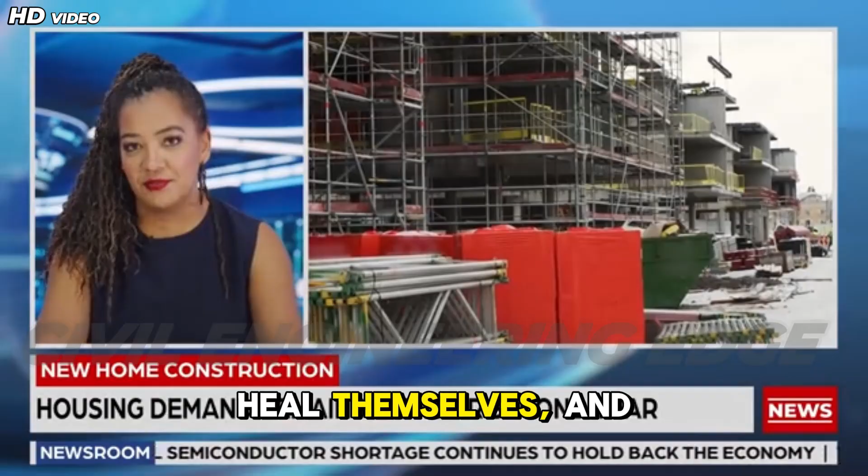Imagine buildings that literally breathe, heal themselves, and even grow over time. What if your home could automatically repair its own cracks, purify polluted air, or regulate temperature like a living organism? Sounds like science fiction, yet this future is already under construction. Today, engineers and architects are blurring the line between biology and infrastructure.

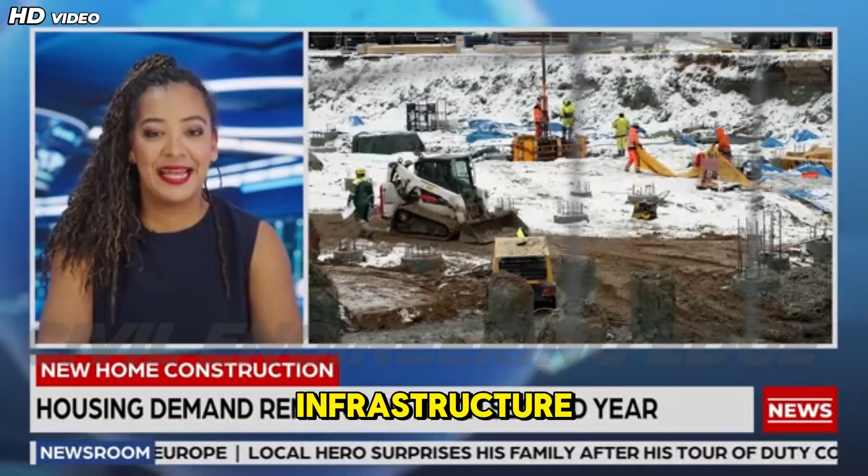Welcome to the revolutionary world of bio-integrated architecture, where buildings are no longer passive concrete shells, but living systems designed to interact with nature. In this video, we'll explore how living organisms, self-healing materials, and bioresponsive systems are redefining sustainability and pushing civil engineering into a new era. Get ready to rethink everything you thought you knew about buildings.

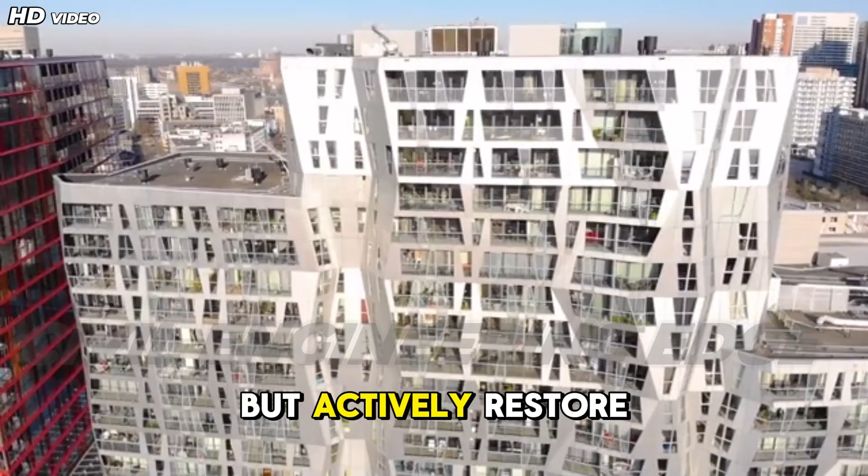Traditional construction has shaped modern civilization, but it has also strained our planet's ecosystems. Today, engineers face a critical challenge: designing structures that do not merely reduce harm, but actively restore environmental balance. In this episode, we dive deep into living buildings and bio-integrated architecture, an emerging field that merges civil engineering, material science, and biology. From self-healing concrete to photosynthetic façades, we'll explore how buildings can become adaptive, regenerative systems. This is not just architecture, it's the future of engineering itself.

Imagine buildings that literally breathe. Imagine a building that behaves not as a sealed concrete box, but as a living, responsive organism, one that continuously exchanges air, energy, and moisture with its surroundings. In bio-integrated architecture, the idea of buildings that breathe is rooted in real engineering systems inspired by biological respiration and transpiration. These structures are designed to regulate indoor environments naturally while improving the external ecosystem.

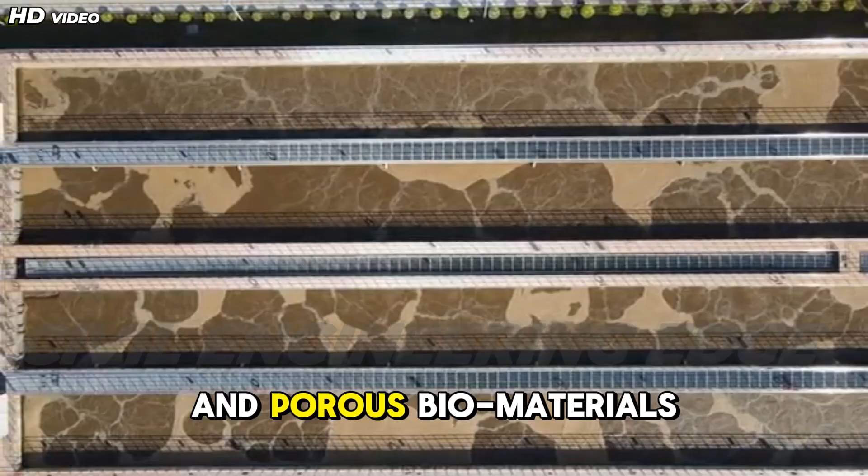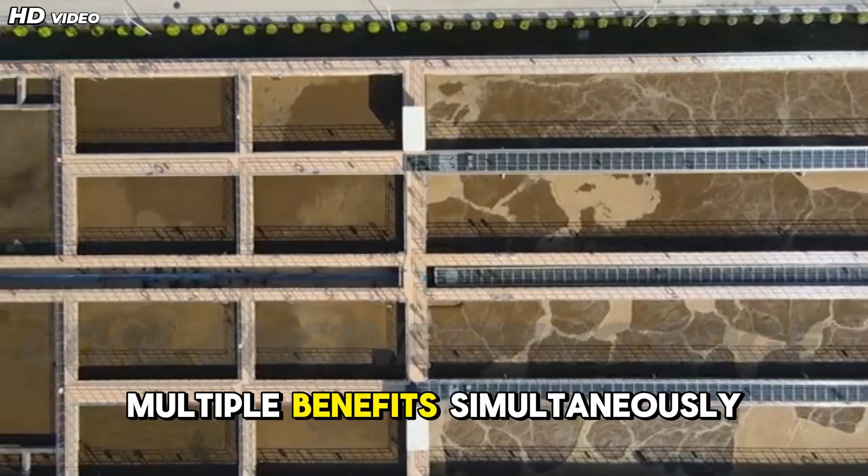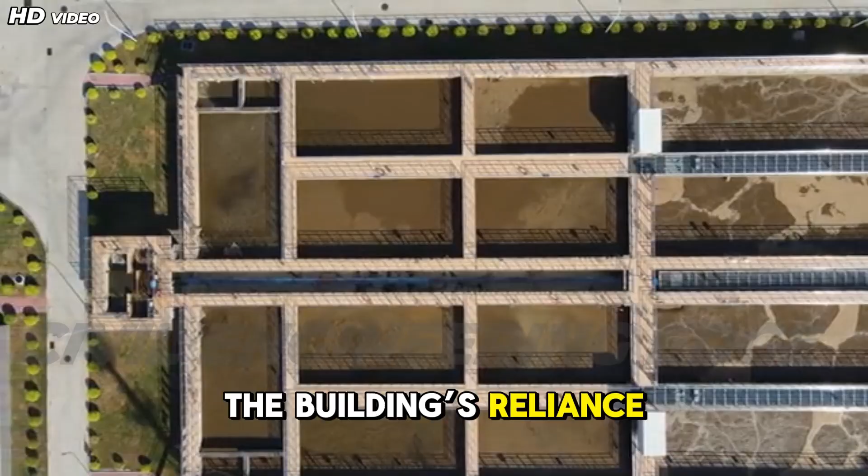Breathing buildings often incorporate living façades, algae bioreactors, and porous biomaterials that enable controlled air exchange. One of the most advanced applications is the use of algae-filled façade panels, where microalgae absorb carbon dioxide and sunlight to perform photosynthesis. From a civil engineering standpoint, this process produces multiple benefits simultaneously: carbon capture, renewable biomass generation, solar shading, and reduction in internal heat gain. As a result, the building's reliance on conventional systems is significantly reduced.

Another key element of breathing buildings is bioresponsive envelopes. These are façade systems designed with hygroscopic or bio-based materials that expand or contract based on humidity and temperature changes. Inspired by plant stomata, these envelopes open when ventilation is needed and close when conditions are harsh without motors, sensors, or external power. This passive adaptability represents a major shift from mechanical dependency to material intelligence.

In polluted urban environments, breathing buildings act as environmental filters. Living walls made from mosses, lichens, and microbial layers trap particulate matter, absorb nitrogen oxides, and improve air quality around dense city corridors. For civil engineers, this transforms buildings into decentralized air purification infrastructure. Ultimately, breathing buildings challenge the traditional definition of a structure. They are no longer static shelters, but active environmental systems that continuously interact with nature. This concept pushes civil engineering toward designs that prioritize adaptability, resilience, and long-term ecological balance.

Beyond green: why do current sustainable buildings fall short? Over the past few decades, sustainable or green buildings have played an important role in reducing energy consumption and minimizing environmental damage. However, despite these advancements, most green buildings remain fundamentally passive systems. They focus on efficiency, using less energy, less water, and fewer resources, rather than actively contributing to environmental restoration. This limitation has become increasingly evident as climate challenges intensify.

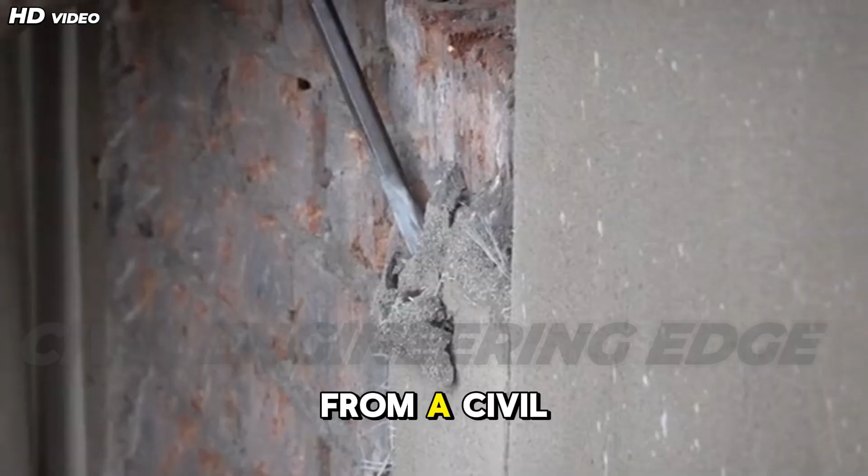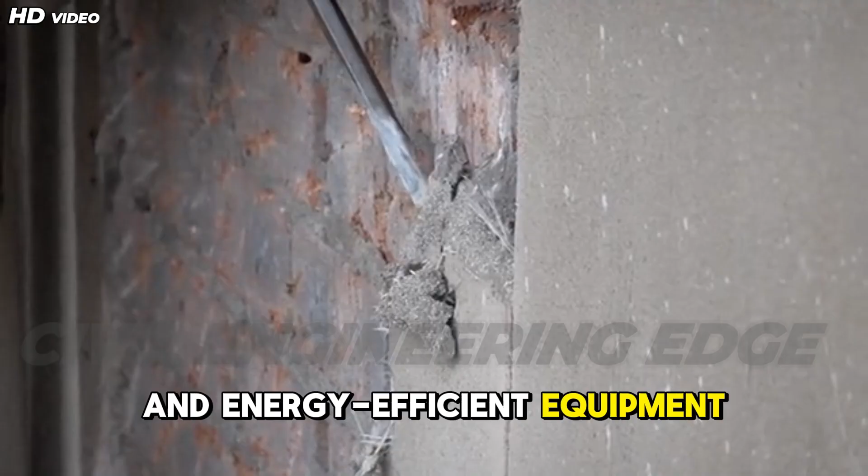From a civil engineering perspective, many sustainable buildings rely heavily on add-on technologies such as solar panels, insulation upgrades, and energy-efficient equipment. While these measures reduce operational emissions, they do not address deeper systemic issues like material degradation, embodied carbon, or long-term infrastructure resilience. Concrete still cracks, steel still corrodes, and façades still deteriorate, requiring frequent repairs and resource-intensive maintenance.

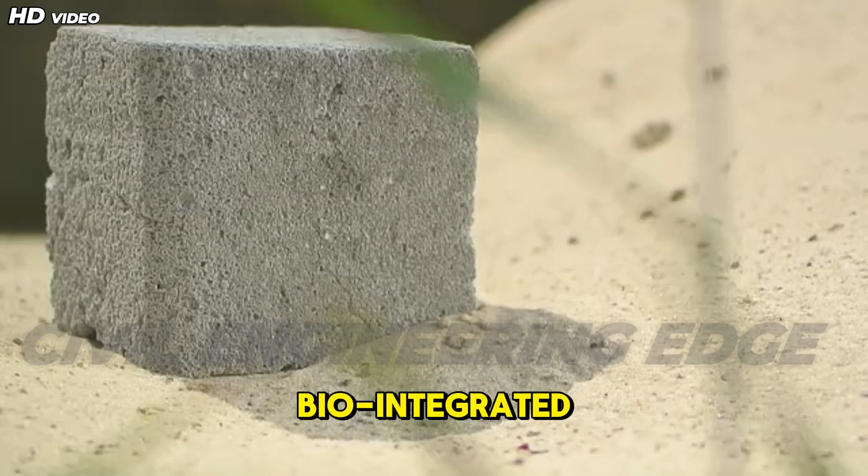Bio-integrated architecture goes beyond efficiency by embedding living systems directly into construction materials. A prime example is self-healing concrete, which contains dormant bacteria that activate when cracks form. When exposed to moisture and oxygen, these bacteria produce calcium carbonate, naturally sealing cracks before they grow into structural defects. For engineers, this significantly extends service life and reduces life cycle costs.

Another shortcoming of conventional green buildings is their isolation from surrounding ecosystems. They may consume fewer resources, but they rarely enhance biodiversity or improve environmental quality. Bio-integrated buildings, in contrast, are designed to coexist and co-evolve with their environment, supporting plant life, managing stormwater naturally, and improving microclimates. In essence, green buildings aim to do less harm. Living buildings aim to do more good. This shift from sustainability to regeneration marks a critical evolution in civil engineering, redefining how infrastructure contributes to planetary health.

A glimpse into the future: bio-integrated cities and living infrastructure. The future of urban development lies not in smarter machines alone, but in living, adaptive infrastructure that evolves alongside its environment.

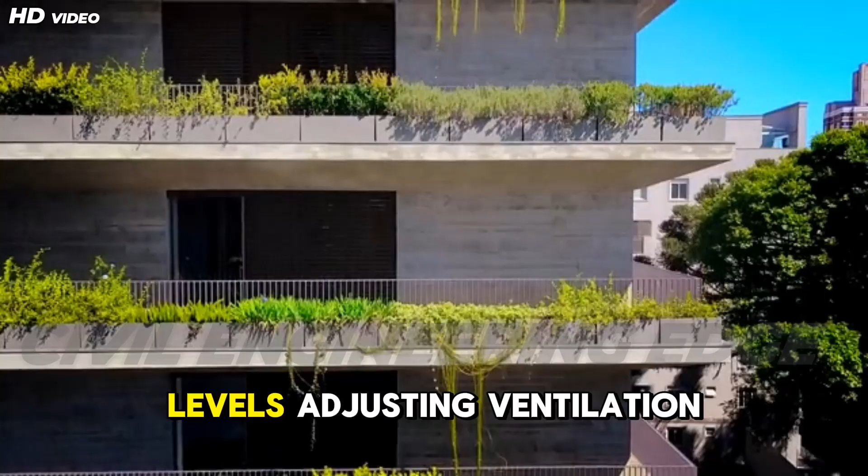Roads and bridges embedded with self-healing materials automatically repair microcracks, preventing premature failure and improving safety. Buildings respond dynamically to temperature, humidity, and pollution levels, adjusting ventilation, shading, and moisture control without human intervention.

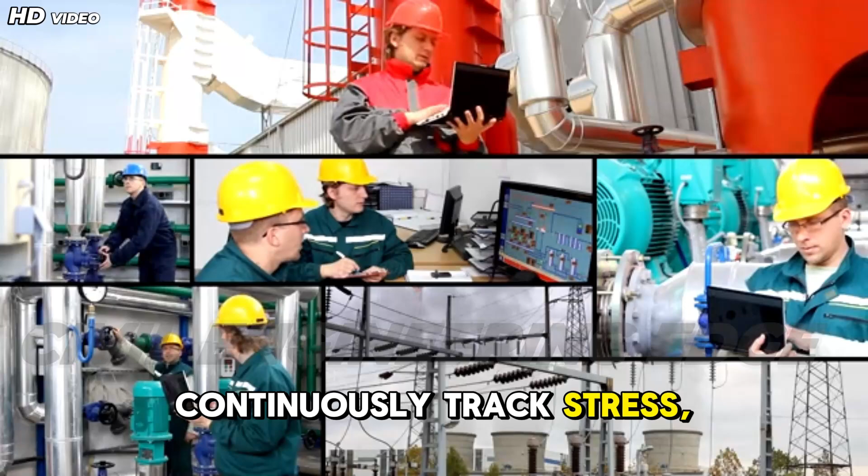For civil engineers, this future demands a multidisciplinary approach. Structural design will integrate biology, material science, and data-driven monitoring systems. Sensors embedded in living materials will continuously track stress, strain, and environmental conditions, enabling predictive maintenance and real-time performance optimization.

Bio-integrated cities also promise enhanced resilience against climate extremes. Living roofs reduce urban heat island effects, bio-based drainage systems manage floodwaters naturally, and adaptive façades improve energy efficiency during extreme weather events. These systems reduce dependency on centralized infrastructure, making cities more robust and flexible.

As research advances and pilot projects scale up, bio-integrated architecture will move from experimental innovation to mainstream practice. Engineers who embrace this paradigm today will shape the cities of tomorrow. Living buildings are not just the future of architecture, they represent the next evolutionary step in civil engineering, where infrastructure becomes a living partner in healing the planet.

Nature's blueprints, from algae to self-healing concrete. Nature has spent billions of years optimizing structures for strength, efficiency, and resilience. Bio-integrated architecture draws directly from these natural systems, translating biological intelligence into engineering solutions. Instead of forcing buildings to resist environmental forces, engineers are now learning how to collaborate with natural processes.

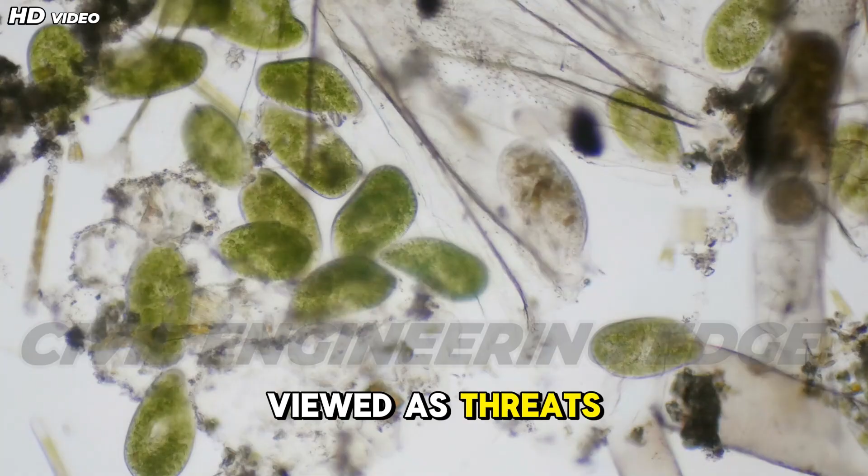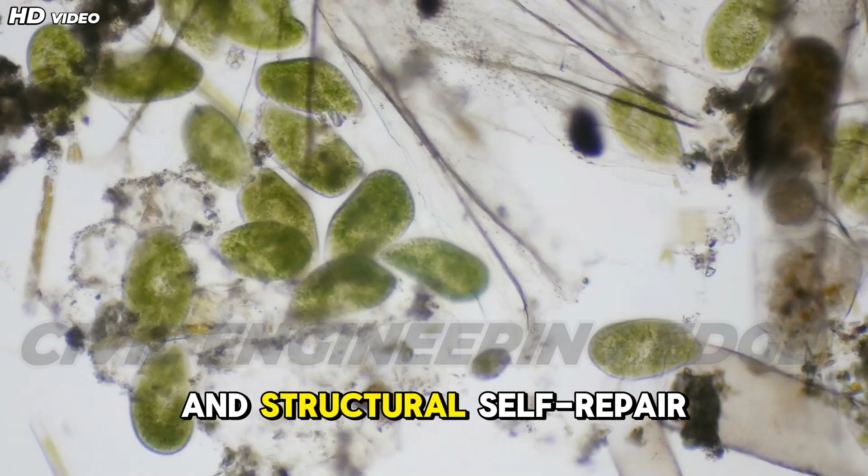Algae, fungi, bacteria, and microbial colonies are no longer viewed as threats to buildings, but as functional components. These organisms perform tasks such as energy generation, insulation, carbon sequestration, and structural self-repair, tasks that traditionally required complex mechanical systems. Nature's blueprints emphasize efficiency through simplicity.

Biological systems operate with minimal energy input, self-regulate under changing conditions, and repair damage autonomously. Translating these principles into construction materials allows engineers to reduce maintenance demands, extend structural lifespan, and dramatically lower environmental impact.

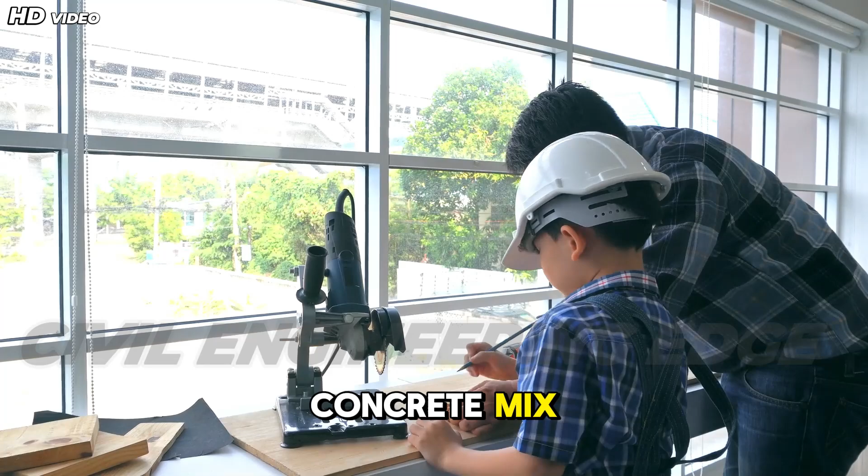For students and professionals alike, understanding these biological mechanisms is becoming as important as mastering concrete mix design or structural analysis. As codes evolve and sustainability targets tighten, bio-integrated materials will move from experimental prototypes to standard engineering practice.

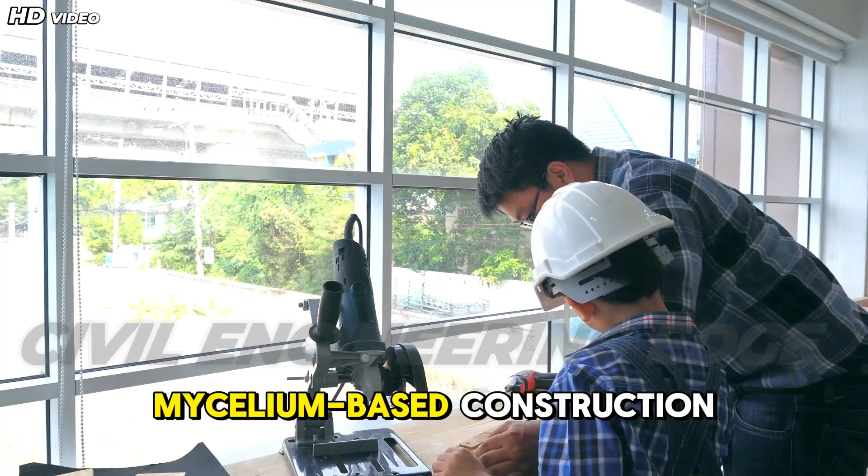This section explores three of the most promising innovations, inspired directly by nature: photosynthesizing façades, mycelium-based construction, and bioreceptive self-healing concrete, each redefining what buildings can do. Photosynthesizing façades, turning building skins into energy factories.

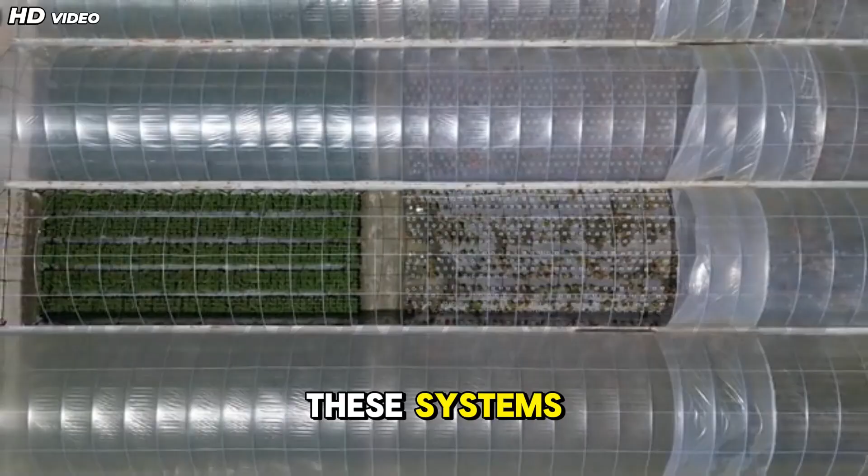Photosynthesizing façades represent one of the most revolutionary applications of bio-integrated architecture. These systems use microalgae bioreactors embedded within building envelopes to convert sunlight and carbon dioxide into usable energy. Unlike traditional solar panels that merely convert sunlight into electricity, algae façades perform multiple functions simultaneously, making them uniquely valuable from an engineering standpoint.

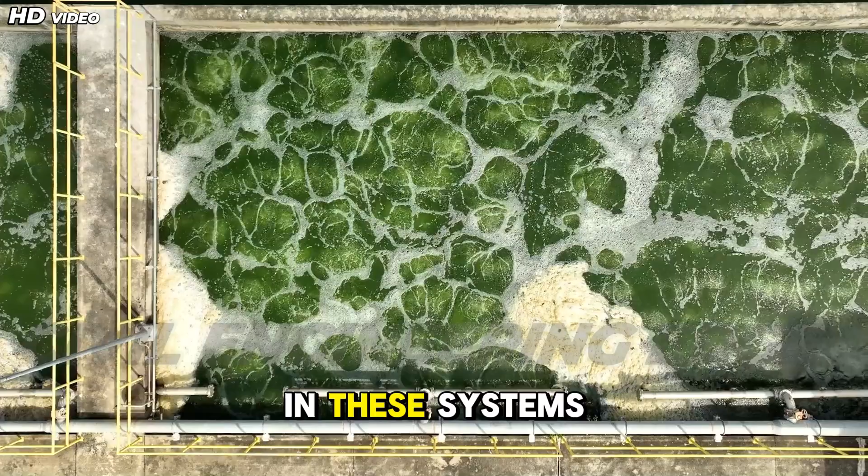In these systems, transparent or semi-transparent panels are filled with water and microalgae cultures. When exposed to sunlight, the algae undergo photosynthesis, absorbing CO2 and producing biomass. This biomass can later be harvested and converted into biofuel or thermal energy.

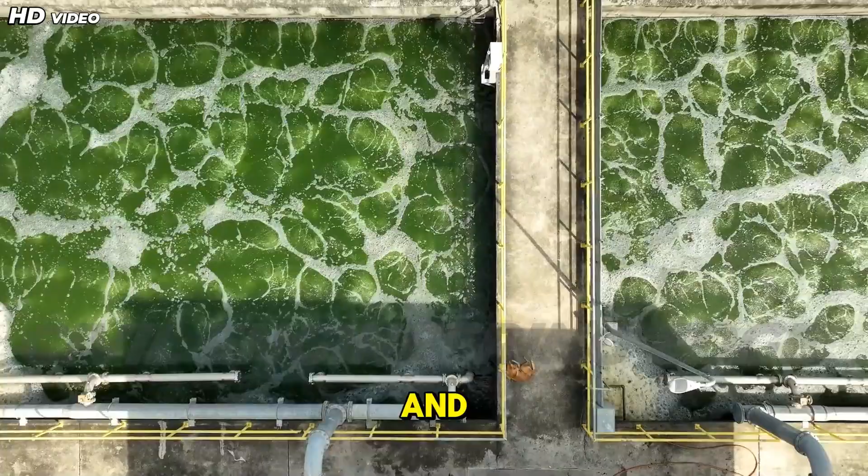At the same time, the dense algae layer provides dynamic solar shading, reducing heat gain and lowering cooling loads inside the building. From a civil engineering perspective, these façades act as climate-responsive envelopes.

As algae density increases in strong sunlight, shading increases automatically. During low light conditions, the panels become more transparent, allowing natural daylight to penetrate. This passive regulation significantly reduces reliance on mechanical and artificial lighting systems.

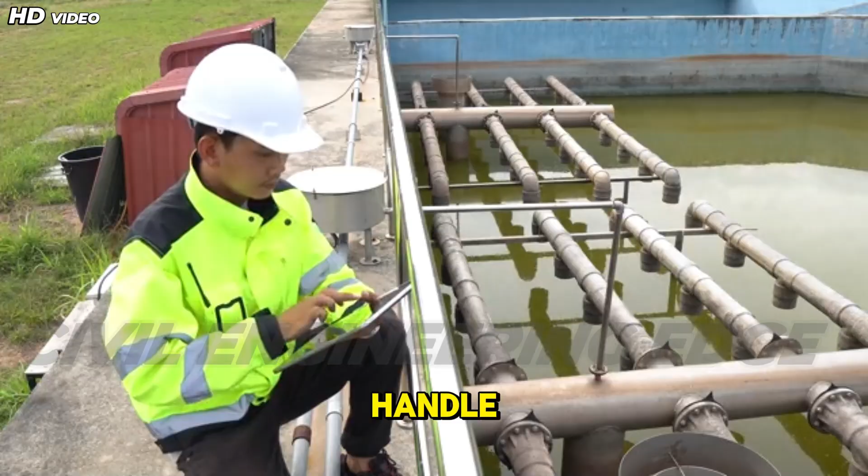Structurally, algae façades must be carefully engineered to handle fluid loads, pressure variations, and long-term durability. Engineers must account for panel weight, anchoring systems, maintenance access, and integration with structural frames. Despite these challenges, real-world pilot projects have demonstrated long-term feasibility and energy efficiency gains.

Beyond energy production, photosynthesizing façades actively contribute to carbon sequestration, transforming buildings into environmental assets. For dense urban areas struggling with pollution and energy demand, these façades offer a scalable solution, turning city skylines into living power plants. Mycelium as a building block, fungal networks in construction.

Mycelium, the root-like network of fungi, has emerged as a surprising yet powerful building material in bio-integrated architecture. In nature, mycelium forms dense, interconnected networks capable of binding soil, decomposing organic matter, and creating structurally resilient systems. Engineers are now harnessing these properties to develop lightweight, sustainable construction materials.

Mycelium-based materials are grown by combining fungal spores with agricultural waste such as straw or sawdust. As the fungi grow, they bind the organic matter together, forming a solid mass. Once growth is complete, the material is heat-treated to halt biological activity, creating a stable, non-living composite suitable for construction.

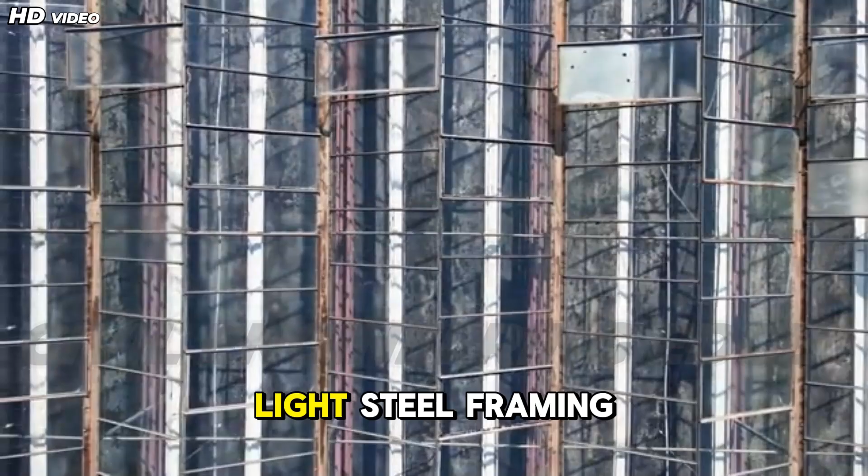Structurally, while mycelium cannot replace reinforced concrete or steel in primary load-bearing systems, it plays a crucial role in hybrid construction models. Combined with timber or light steel framing, mycelium components significantly reduce embodied carbon and improve indoor environmental quality.

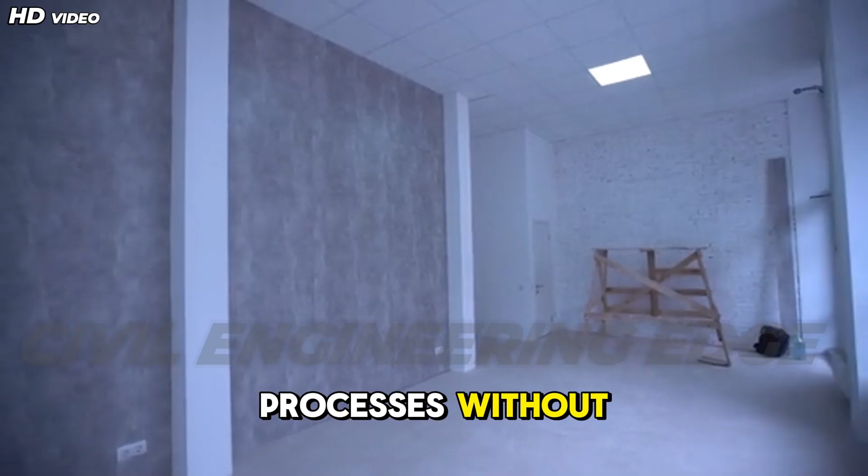Additionally, mycelium materials regulate humidity naturally and resist mold growth, improving occupant comfort. For civil engineers focused on sustainable design, mycelium demonstrates how biological systems can replace energy-intensive industrial processes without compromising performance.

Bioreceptive concrete, materials that heal themselves. Concrete is the backbone of modern infrastructure, but it is also prone to cracking, which leads to durability issues and costly maintenance. Bioreceptive or self-healing concrete addresses this challenge by integrating biological repair mechanisms directly into the material.

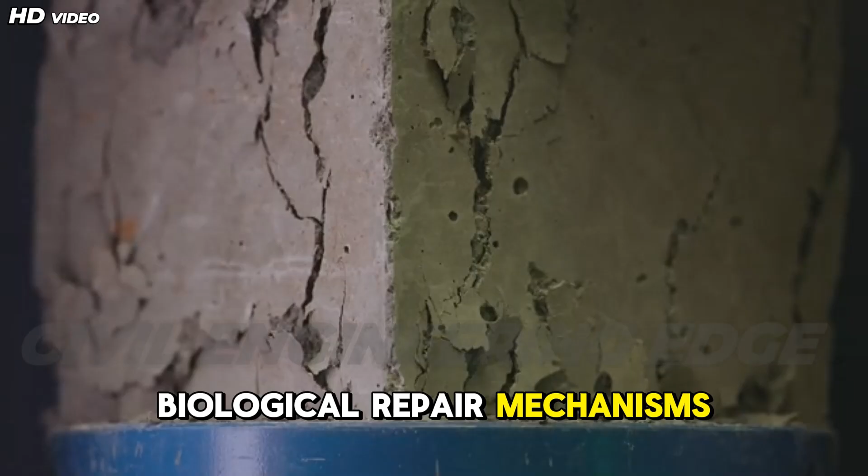This innovative concrete contains dormant bacteria, often from the Bacillus family, along with nutrients such as calcium lactate. Under normal conditions, the bacteria remain inactive. When cracks form and water enters, the bacteria become active and produce calcium carbonate, which fills and seals the cracks naturally. From a civil engineering perspective, this process prevents microcracks from expanding into structural failures.

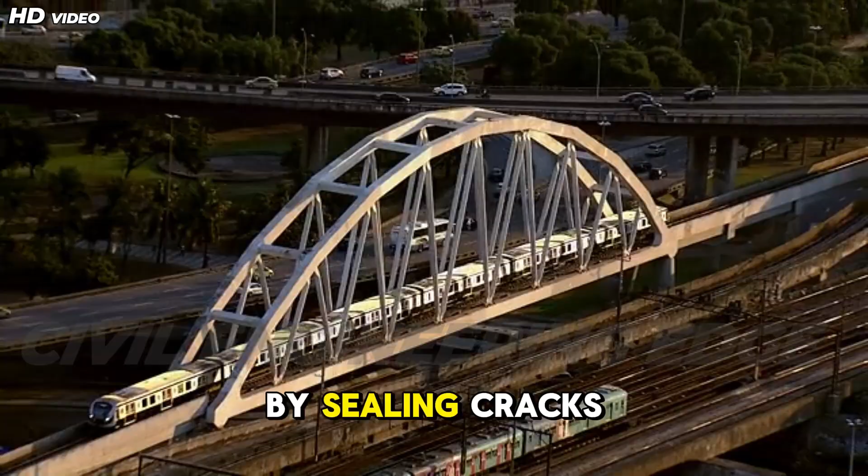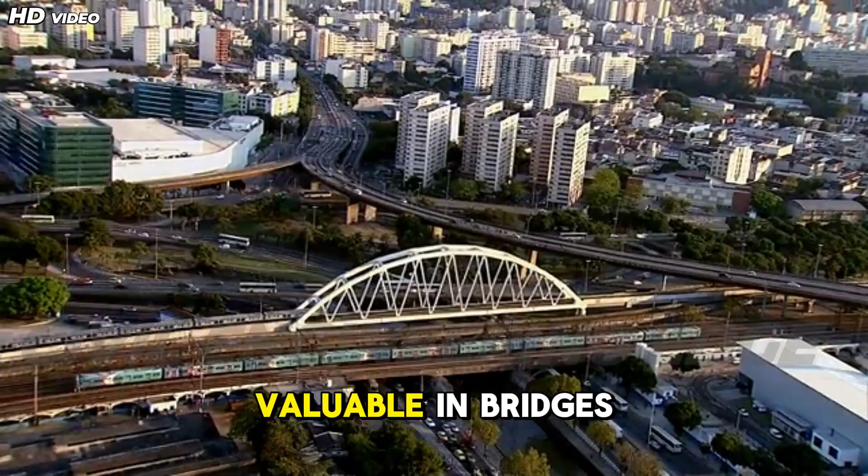By sealing cracks early, self-healing concrete protects embedded reinforcement from corrosion, significantly extending service life. This is particularly valuable in bridges, tunnels, marine structures, and foundations exposed to harsh environments.

Bioreceptive concrete also supports controlled biological growth on surfaces, allowing mosses or microorganisms to colonize the material without compromising strength. This enhances aesthetic appeal while contributing to air purification and urban cooling.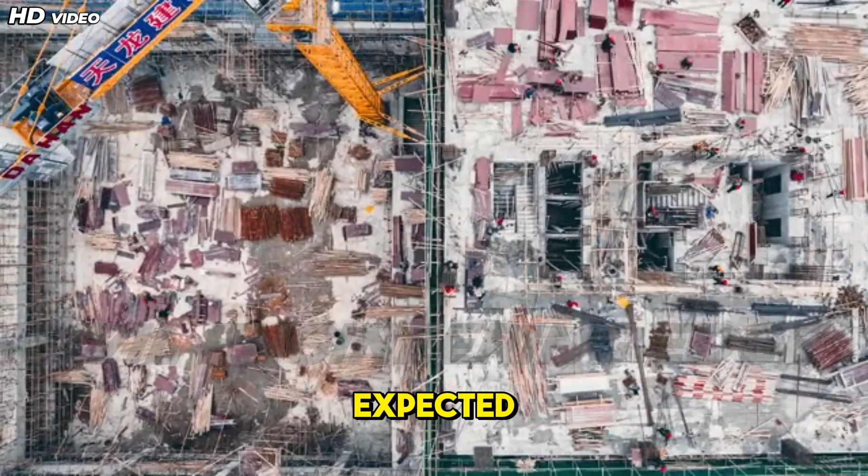While initial costs are higher than conventional concrete, life cycle cost analysis shows substantial savings due to reduced repairs and extended durability. As standards evolve, self-healing concrete is expected to become a mainstream material in resilient infrastructure design.

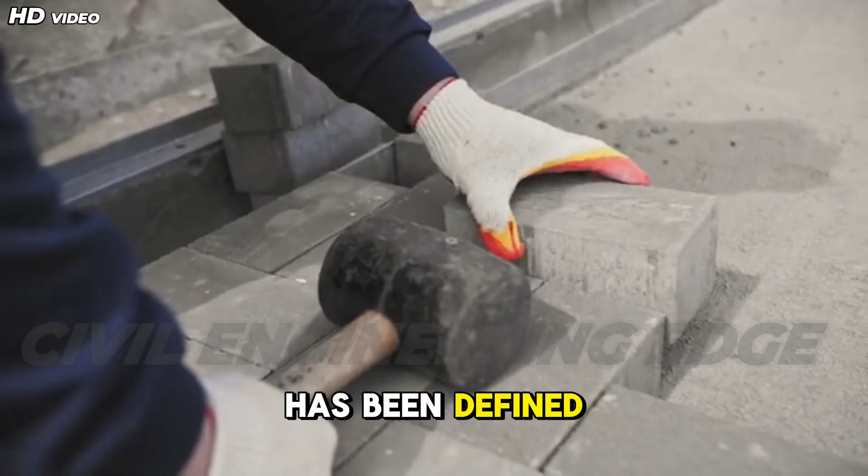Engineering the impossible, designing for life. For centuries, civil engineering has been defined by the mastery of inert materials: stone, steel, concrete, and asphalt. These materials are strong, predictable, and reliable, but fundamentally lifeless.

Bio-integrated architecture challenges this tradition by asking a radical question: what if buildings were designed to host life rather than resist it? Engineering the impossible means creating structures that can grow, adapt, and repair themselves while maintaining structural safety and performance. Designing for life introduces unprecedented complexity into engineering practice.

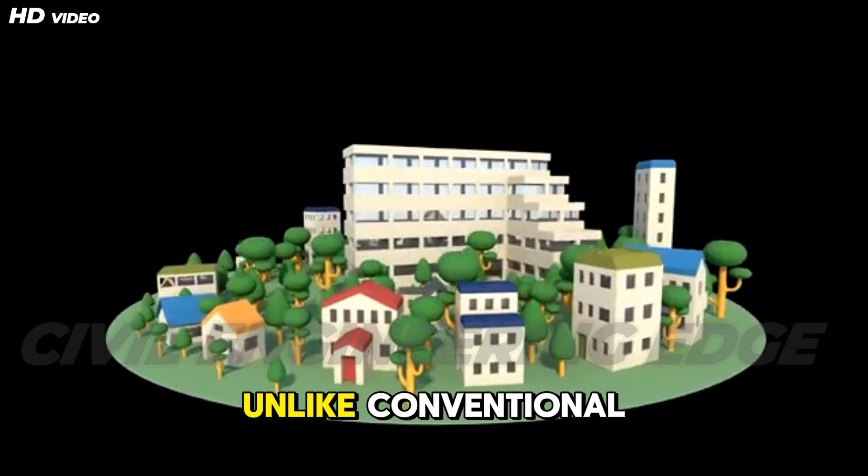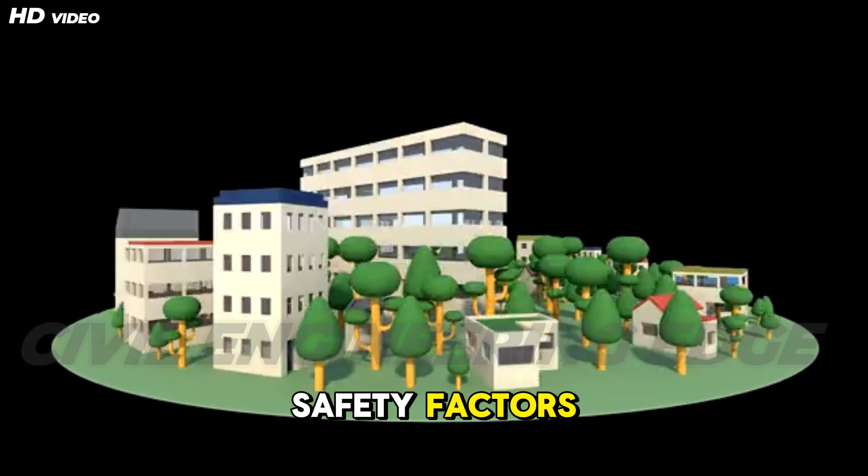Living systems are dynamic, non-linear, and responsive to environmental stimuli. Unlike conventional materials with fixed properties, biological components evolve over time. This requires civil engineers to rethink design methodologies, safety factors, and maintenance strategies.

Structural design is no longer based solely on static loads and material strengths, but also on biological behavior, growth cycles, and environmental feedback. This paradigm shift is supported by advances in synthetic biology, material science, robotics, and computational modeling.

Engineers can now predict how microbial colonies will behave under stress, how smart materials respond to temperature and humidity, and how automated systems can place living components with extreme precision. Together, these technologies make it possible to design buildings that are alive in function, though controlled in performance.

Engineering living systems does not replace traditional engineering principles, it expands them. Codes, standards, and testing protocols are beginning to evolve to accommodate bioresponsive materials. As this field matures, engineers capable of integrating life into structures will be at the forefront of resilient, regenerative infrastructure development.

Microbial architecture: engineering bacteria to produce materials on demand. Microbial architecture represents one of the most groundbreaking intersections of civil engineering and synthetic biology. Instead of manufacturing materials in factories and transporting them to construction sites, this approach explores how engineered bacteria can produce building materials directly within structures, on demand, and in response to environmental conditions.

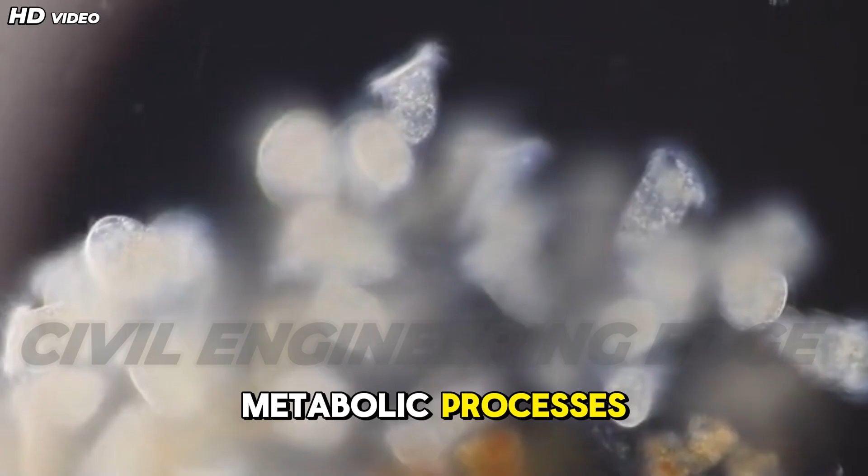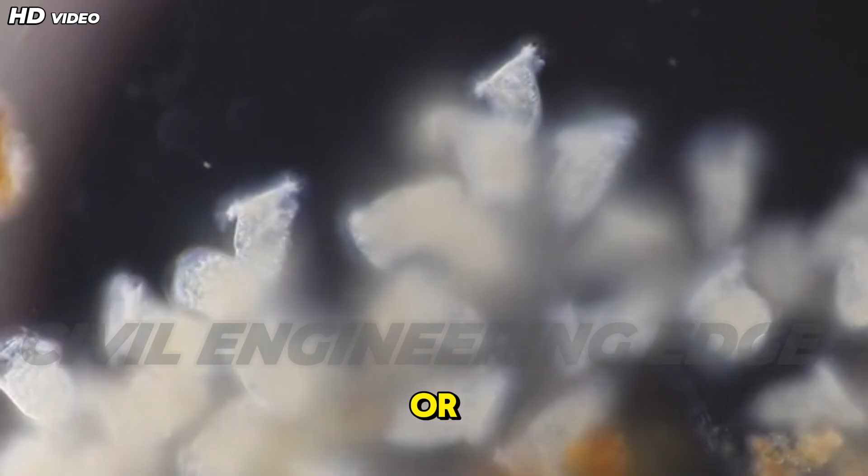Certain bacteria naturally produce minerals as part of their metabolic processes. Engineers are now genetically programming these microorganisms to enhance and control these behaviors. For example, bacteria can be designed to precipitate calcium carbonate, silica, or biopolymers when activated by moisture, stress, or chemical signals. In practice, this means a wall or foundation could strengthen itself over time or repair internal damage without human intervention.

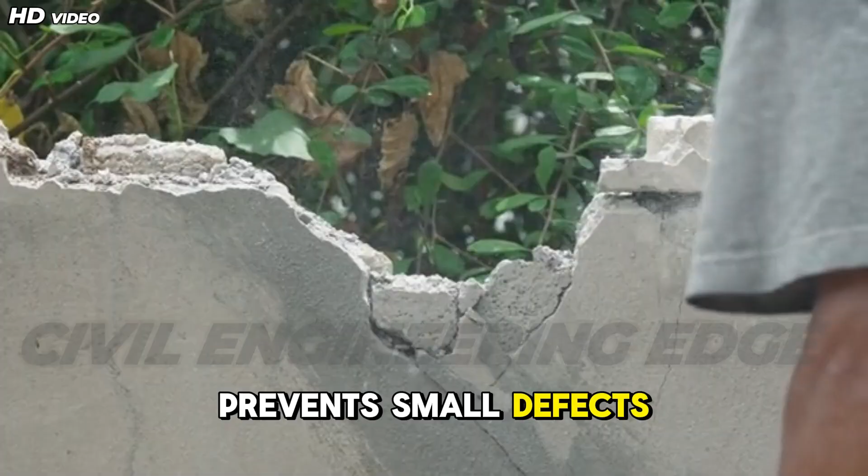From an engineering perspective, microbial material production offers enormous advantages. Cracks, voids, or weak zones within concrete can trigger microbial activity, initiating material deposition exactly where it is needed. This localized response reduces material waste and prevents small defects from developing into structural failures. In underground structures and remote infrastructure, such autonomous repair capabilities are particularly valuable.

Microbial architecture also enables in situ manufacturing. Instead of casting large components off-site, materials can be grown within formwork or porous scaffolds. This reduces transportation emissions and allows construction in challenging environments such as disaster zones or extraterrestrial habitats.

Safety and control are critical considerations. Engineered microbes are designed to remain dormant unless specific conditions are met and are deactivated once their function is complete. For civil engineers, this ensures predictable performance and regulatory compliance. Microbial architecture redefines construction as a biological process, positioning engineers not only as builders, but as designers of living material systems.

Adaptive skins, smart polymers, and biological sensors in building envelopes.

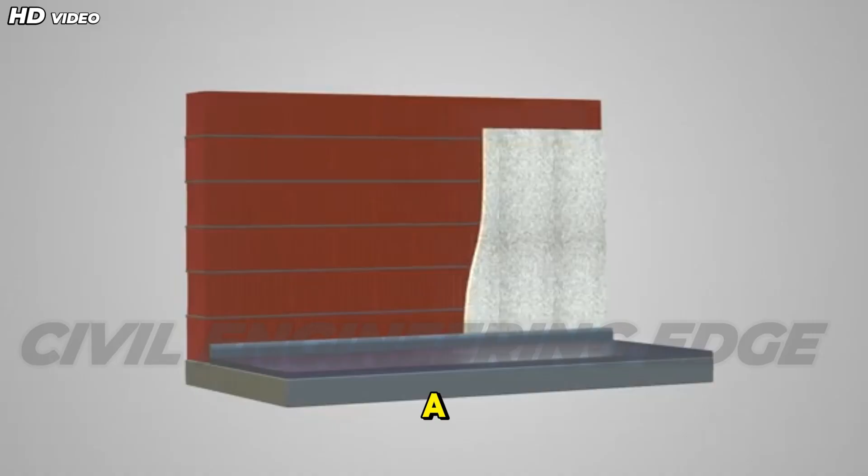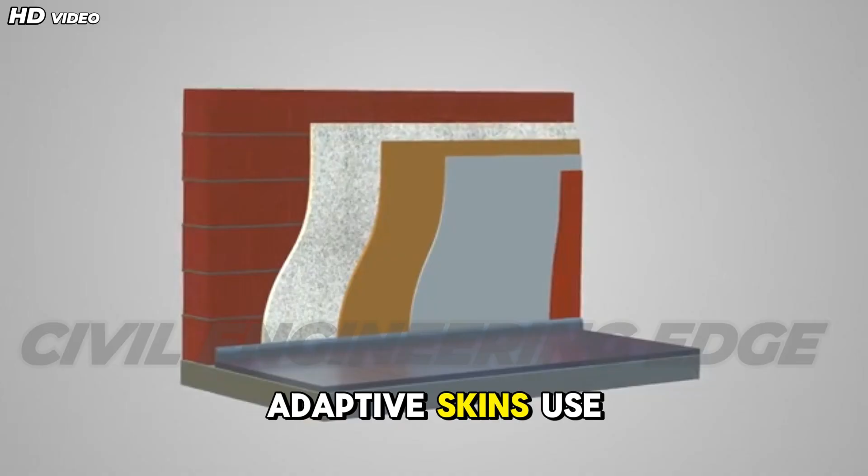The building envelope is the primary interface between a structure and its environment. Adaptive skins transform this interface into an intelligent, responsive system capable of reacting to changing climate conditions in real time. Unlike conventional façades that rely on mechanical systems, adaptive skins use smart polymers, biological sensors, and bio-inspired mechanisms to regulate building performance autonomously. Smart polymers can change shape, transparency, or permeability when exposed to heat, moisture, or light.

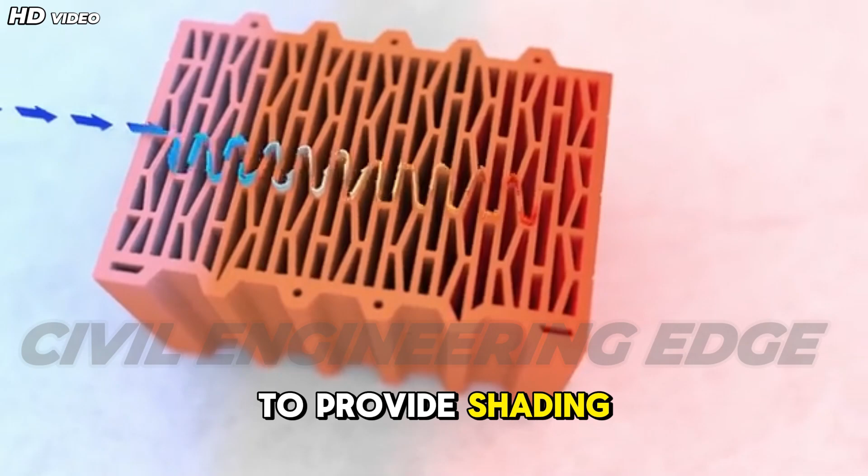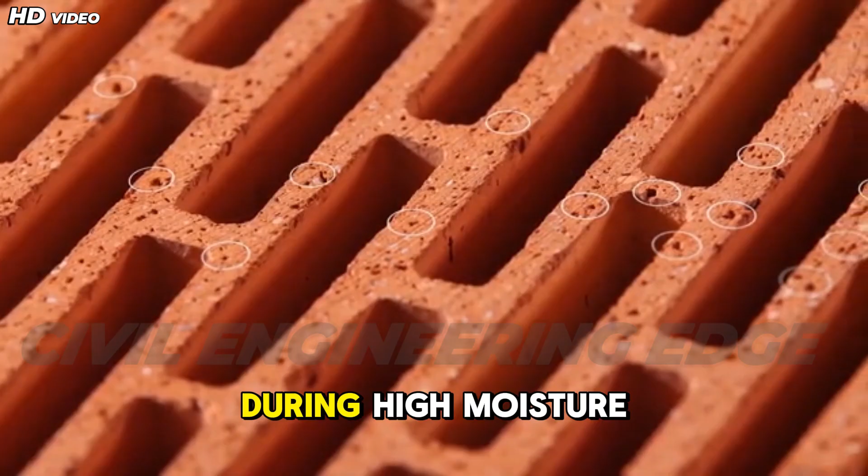For example, thermoresponsive polymers expand under high temperatures to provide shading and contract in cooler conditions to maximize solar gain. Hygro-responsive materials react to humidity, opening microvents to enhance ventilation during high moisture conditions. Biological sensors, inspired by plant and animal systems, detect environmental changes such as air quality, UV radiation, or temperature fluctuations. These sensors trigger material responses without external energy input, allowing buildings to sense and react much like living organisms.

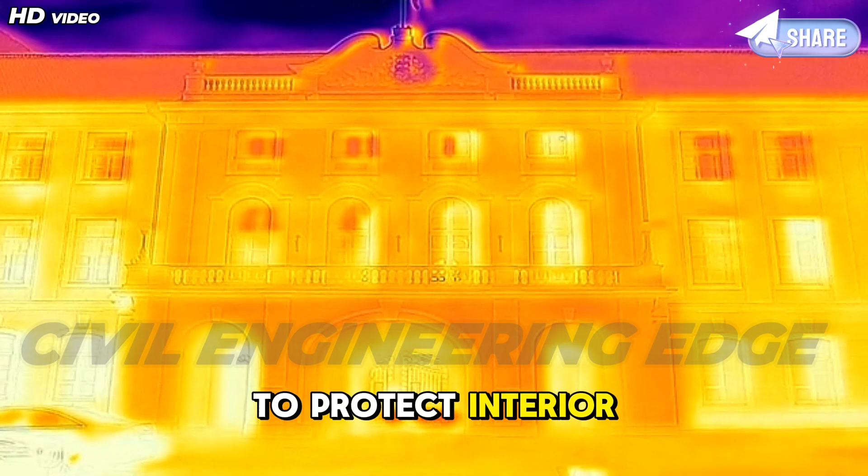From a civil engineering standpoint, adaptive skins reduce reliance on fixed systems, improve energy efficiency, and enhance occupant comfort. Structurally, these systems must be designed to withstand wind loads, thermal expansion, and long-term fatigue while maintaining biological functionality. Adaptive skins also improve building resilience. During heat waves, they reduce thermal stress. During storms, they adjust permeability to protect interior spaces. This adaptability is critical for climate-resilient infrastructure in rapidly changing environments.

By merging material science with biological intelligence, adaptive skins transform façades from static barriers into active climate moderators, marking a significant evolution in building design.

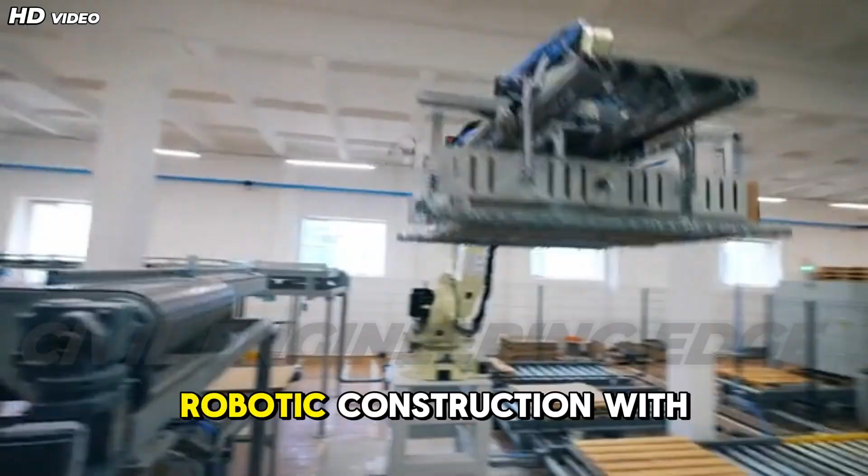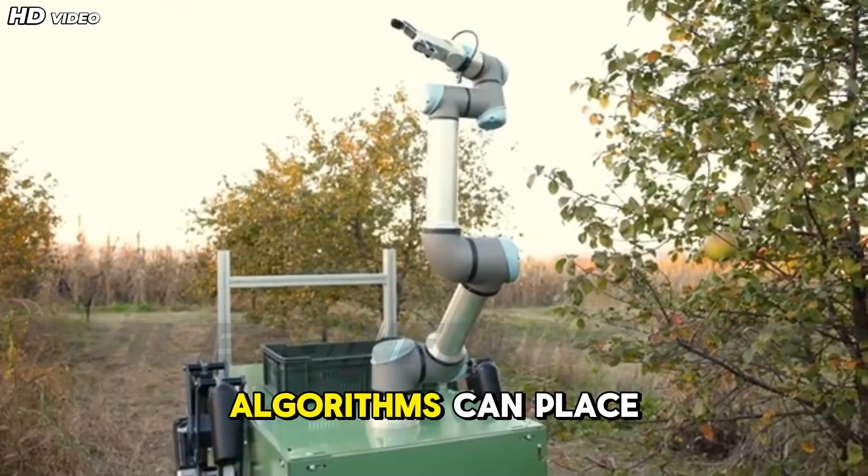Robotic construction with living elements. Automation meets biology. The integration of robotics into construction has already improved precision, safety, and efficiency. When combined with bio-integrated materials, robotics enables the controlled placement and cultivation of living elements within structures, something impossible with traditional construction methods. Robotic systems equipped with sensors and AI algorithms can place living materials such as bioconcrete, algae panels, or mycelium components with millimeter accuracy.

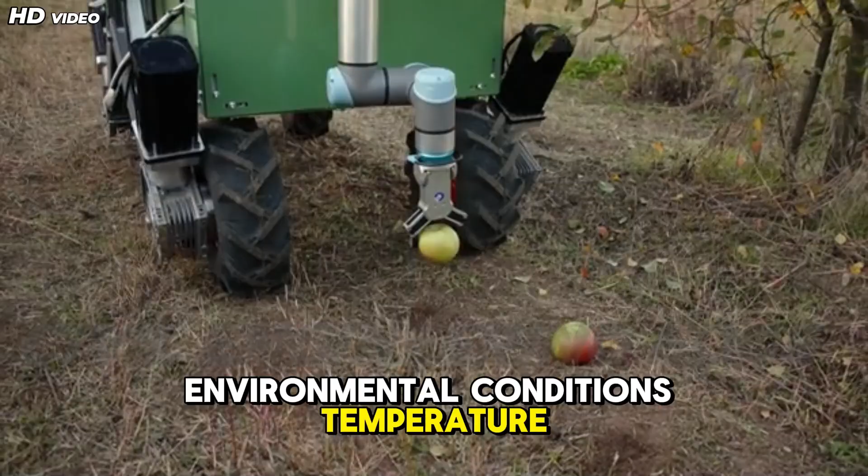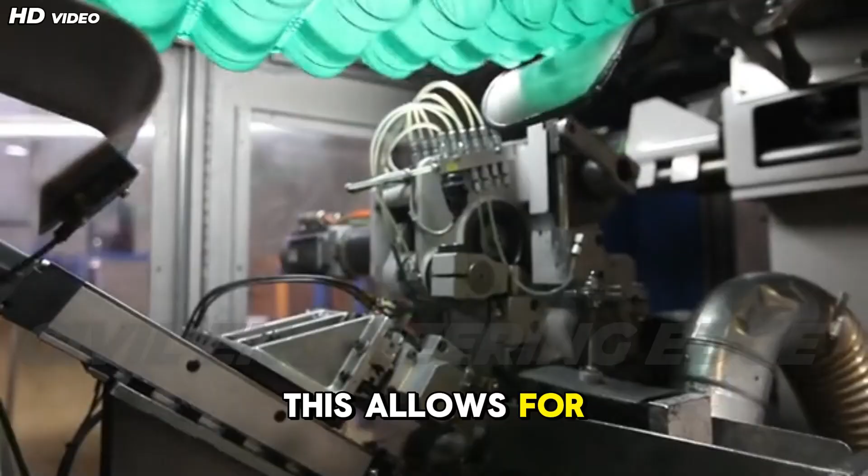These systems monitor environmental conditions, temperature, humidity, and light to ensure optimal growth and performance of biological components during and after installation. In 3D printing, robotic arms can extrude bioreceptive materials layer by layer, embedding microbial capsules or organic fibers exactly where needed. This allows for customized structural behavior, such as reinforced healing zones or climate-responsive surfaces.

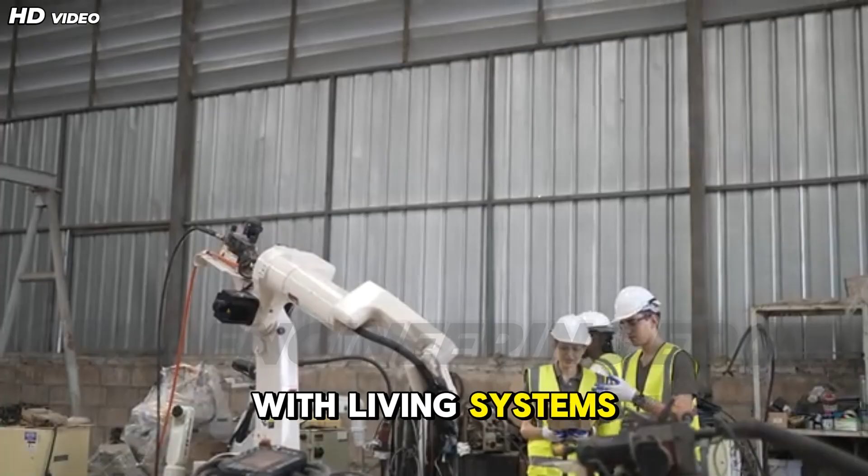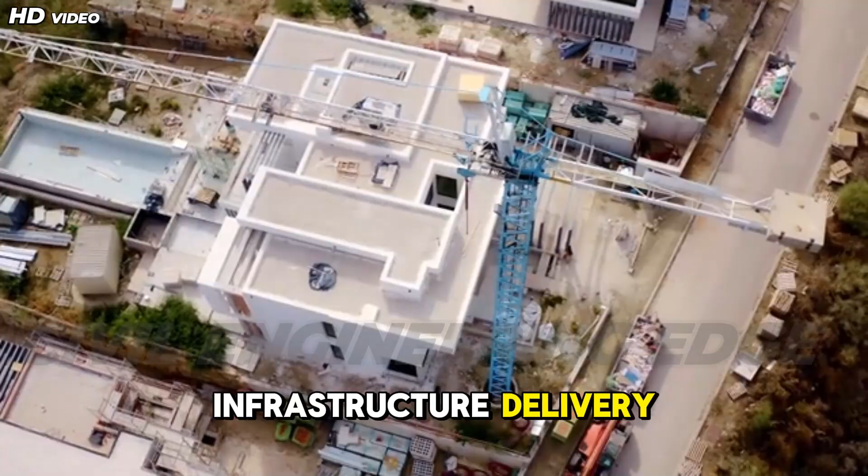Automation also enhances safety when working with living systems. Robots can operate in hazardous environments, maintain sterile conditions, and manage biological materials without exposing workers to risk. This precision ensures consistent quality and scalability. For civil engineers, robotic bioconstruction represents the future of complex infrastructure delivery. It allows large-scale implementation of living systems while maintaining strict engineering control. The marriage of robotics and biology transforms construction sites into precision laboratories, where life and structure are built simultaneously.

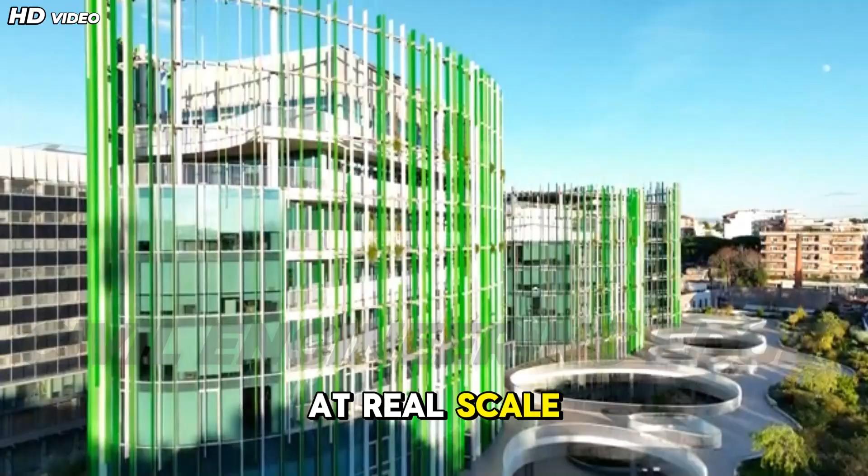Case studies and early adopters, where it's happening now. Bio-integrated architecture is no longer confined to research papers or futuristic concepts. Across the world, universities, research institutes, and forward-thinking developers are actively testing living building technologies at real scale. These early adopters play a critical role in transforming experimental ideas into viable engineering solutions.

By monitoring performance, durability, cost, and user response, these projects provide essential data that informs future design standards and construction practices. For civil engineers, case studies serve as proof that bio-integrated systems can meet structural, environmental, and safety requirements simultaneously. These early projects often operate as living laboratories, where façades, materials, and structural systems are continuously monitored and optimized. Data collected from these buildings helps engineers refine material compositions, improve design methods, and validate long-term performance assumptions.

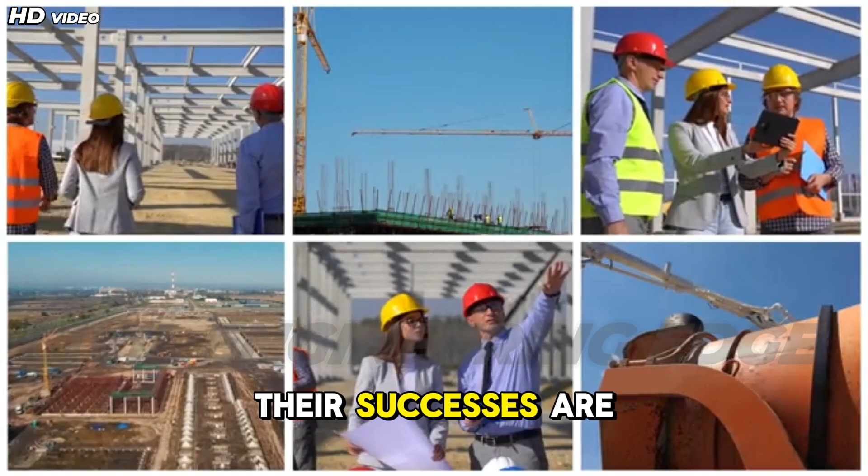Importantly, early adopters are not limited to one region or building type. Bio-integrated technologies are being tested in academic campuses, office buildings, housing prototypes, and urban infrastructure projects across Europe, Asia, and North America. These real-world implementations demonstrate that living buildings are adaptable to different climates, regulatory environments, and construction cultures. While many of these projects remain experimental, their successes are reshaping how governments, investors, and engineers perceive the future of sustainable infrastructure. Case studies bridge the gap between theory and practice, proving that bio-integrated architecture is not only feasible, but increasingly necessary for resilient urban development.

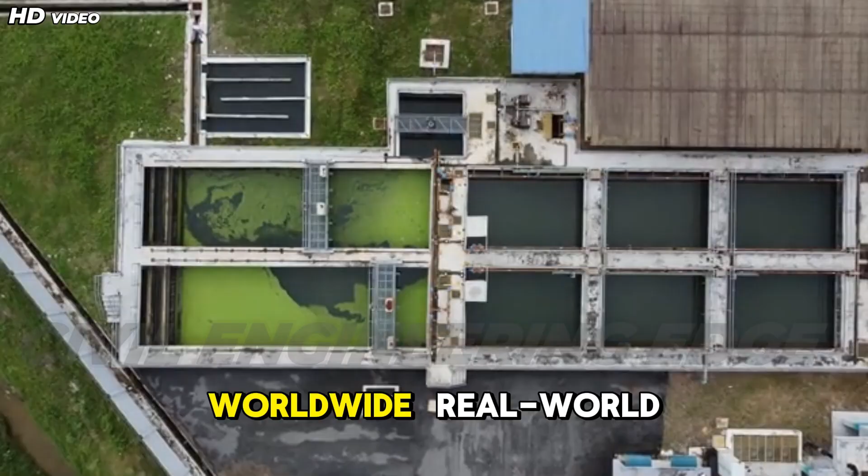Pilot projects worldwide. Real-world experiments in living architecture. Pilot projects are the backbone of innovation in bio-integrated architecture. Universities and research institutions have been among the earliest adopters, using experimental buildings to test living systems under controlled yet realistic conditions. Many engineering schools now operate dedicated living building laboratories, where algae façades, bioreceptive concrete, and adaptive envelopes are evaluated over time.

Experimental buildings on academic campuses often feature photosynthesizing façades, green roofs, and self-healing materials integrated into structural elements. These projects allow researchers to measure energy performance, material durability, and environmental impact in real time. Sensors embedded within walls and slabs collect data on crack formation, thermal behavior, humidity regulation, and biological activity, data that is invaluable for civil engineers refining design models. Beyond universities, several demonstration buildings have been constructed by forward-thinking developers and municipalities.

These structures test how living systems perform in occupied spaces such as offices and residential units. Initial results show reductions in energy demand, improved indoor air quality, and lower maintenance requirements. Infrastructure pilots are also emerging.

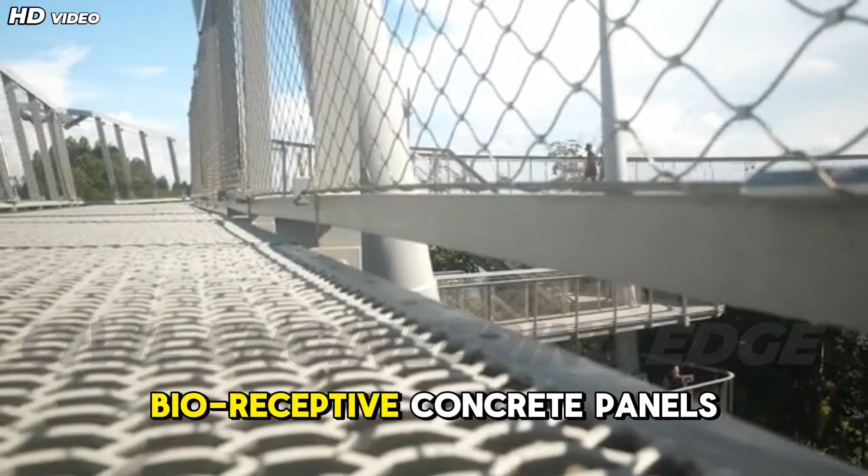Bioreceptive concrete panels are being tested in pedestrian bridges, retaining walls, and noise barriers. These applications evaluate how living materials respond to weather exposure, load cycles, and long-term aging. While these pilot projects are often small in scale, their significance is enormous.

They provide real-world evidence that living architecture can operate safely, efficiently, and predictably. Each successful pilot moves bio-integrated design closer to widespread adoption. Challenges and breakthroughs. Scaling bio-integrated architecture.

While bio-integrated architecture has demonstrated impressive potential in pilot projects, scaling these systems for widespread adoption presents complex engineering, economic, and social challenges. One of the most significant barriers is engineering predictability. Traditional construction materials behave in well-defined ways under load, temperature, and time.

Living systems, however, are dynamic and responsive, introducing variables that engineers must carefully manage. Ensuring consistent performance across different climates, building sizes, and usage patterns requires extensive modeling, monitoring, and long-term testing. Another major challenge lies in standardization and codes.

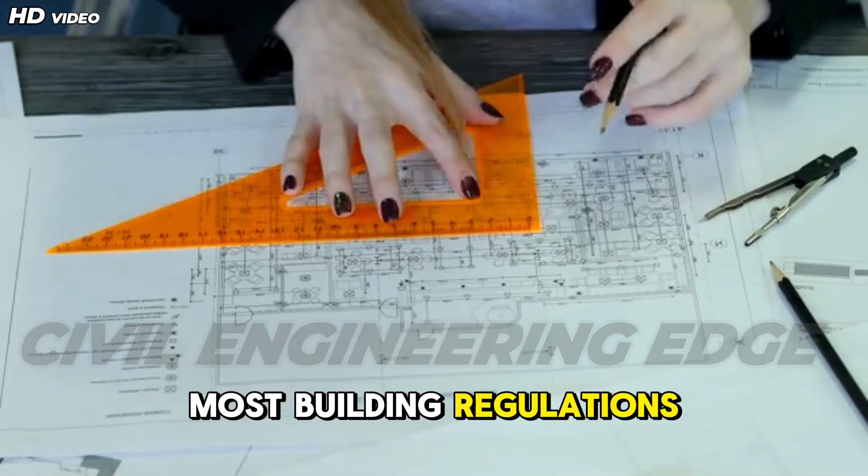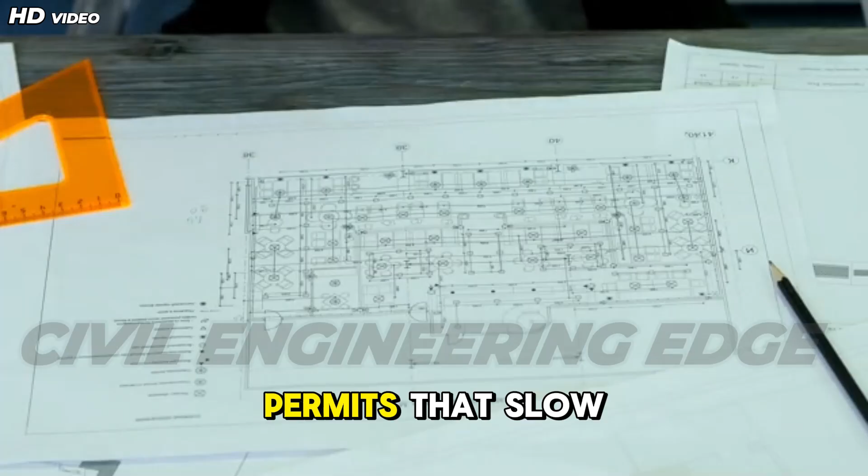Most building regulations were developed for inert materials such as concrete, steel, and masonry. Bio-integrated materials, especially those involving living organisms, do not fit neatly into existing classifications. As a result, engineers often face regulatory uncertainty, requiring special approvals or experimental permits that slow project timelines. Cost remains a critical concern.

Early bio-integrated systems involve higher upfront investments due to research, specialized fabrication, sensor integration, and skilled labor. Developers may hesitate to adopt unfamiliar technologies without proven financial returns. Additionally, maintenance protocols for living systems are still evolving, requiring new expertise and training. Public perception also influences adoption.

Occupants may initially resist the idea of bacteria, algae, or fungi being integrated into their buildings. Concerns about hygiene, durability, and safety must be addressed through education, transparent performance data, and clear engineering controls. Despite these challenges, breakthroughs are accelerating adoption.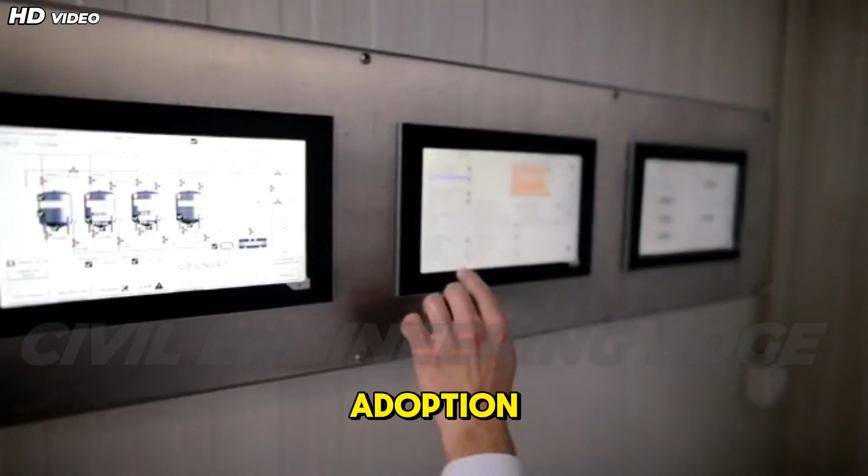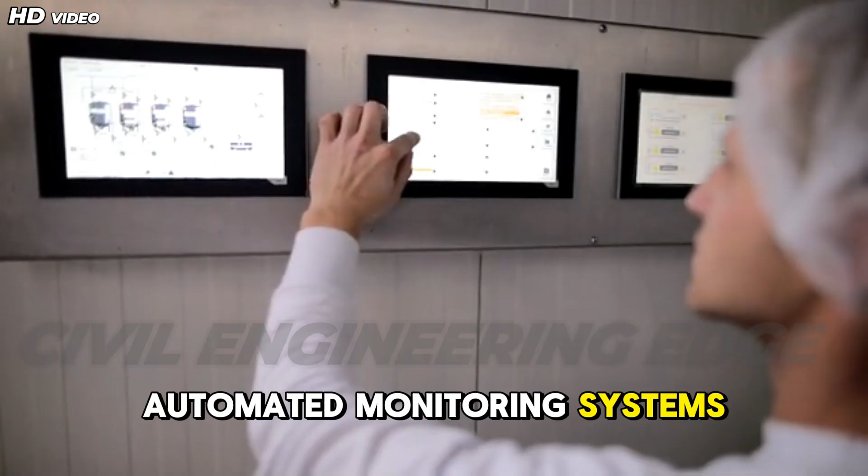Advances in computational simulation allow engineers to predict biological behavior under structural and environmental stress. Automated monitoring systems ensure living components remain within safe operational limits. Costs are decreasing as materials move from laboratory to commercial production. Each breakthrough reduces uncertainty, bringing bio-integrated architecture closer to becoming a reliable, scalable solution for future infrastructure.

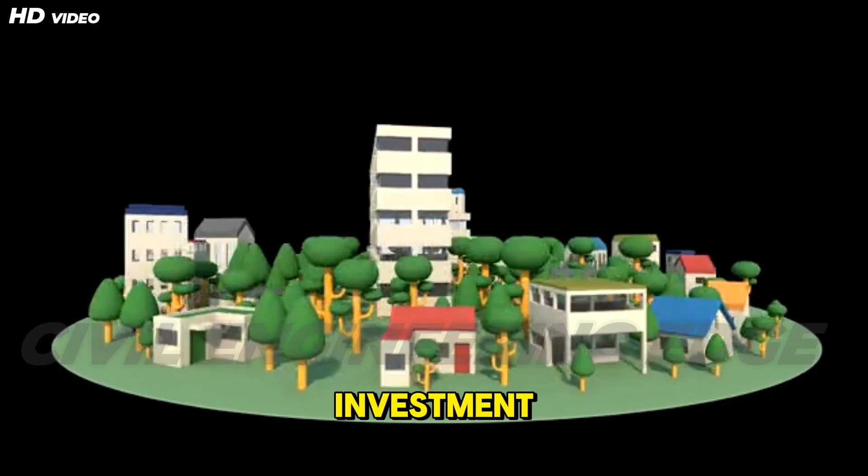The economic and environmental impact. Beyond visual innovation, the long-term impact of bio-integrated architecture extends far beyond visual appeal or experimental novelty. When evaluated through the lens of life cycle engineering and infrastructure economics, living buildings demonstrate compelling advantages that justify their initial investment. Traditional buildings often incur significant costs over time due to repairs, energy consumption, and environmental degradation.

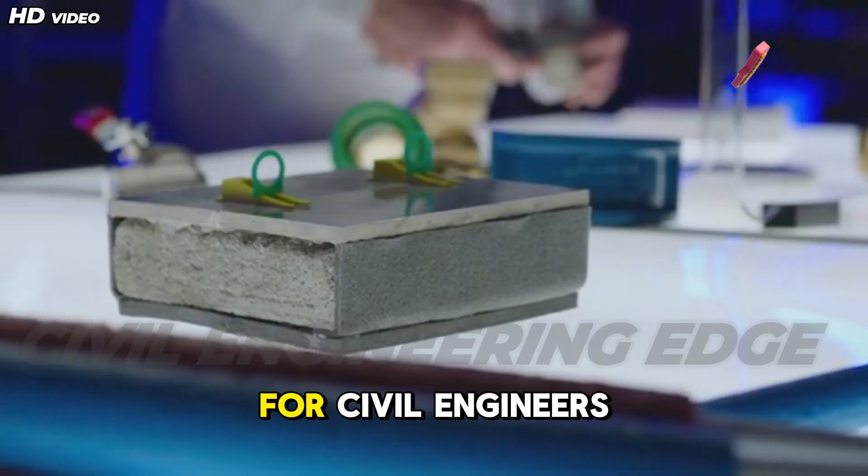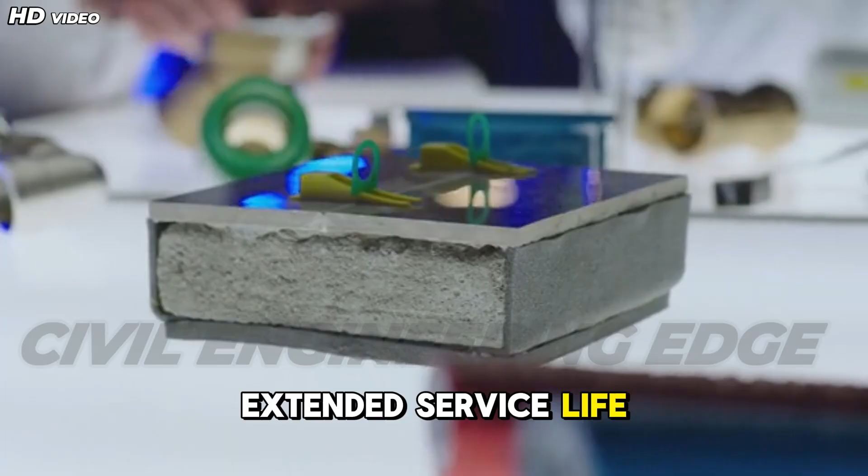Bio-integrated systems fundamentally change this equation. One of the most significant economic benefits is reduced maintenance and repair costs. Self-healing materials automatically address micro-damage before it escalates into major structural issues. For civil engineers responsible for bridges, tunnels, and public infrastructure, this translates into fewer inspections, less downtime, and extended service life. Over decades, these savings can outweigh higher initial construction costs.

Energy efficiency also delivers long-term economic value. Photosynthesizing facades, adaptive skins, and bioresponsive envelopes reduce reliance on mechanical systems, lowering operational energy expenses. In large buildings and urban developments, this results in substantial cost savings while improving indoor environmental quality.

From an environmental perspective, bio-integrated buildings actively contribute to ecosystem restoration. They sequester carbon, improve air quality, reduce urban heat island effects, and manage stormwater naturally. These benefits reduce the burden on municipal infrastructure and healthcare systems, creating indirect economic savings at the city scale.

Moreover, cities that invest in regenerative infrastructure enhance their long-term resilience. As climate risks increase, buildings capable of adapting to extreme temperatures, pollution, and moisture become strategic assets. Insurance costs decrease, asset values rise, and communities become more sustainable.

For civil engineers, the conclusion is clear. Bio-integrated architecture is not merely an environmental statement. It is a financially and environmentally sound infrastructure strategy that delivers measurable returns throughout a building's life cycle. The future is alive. What's next for our cities?

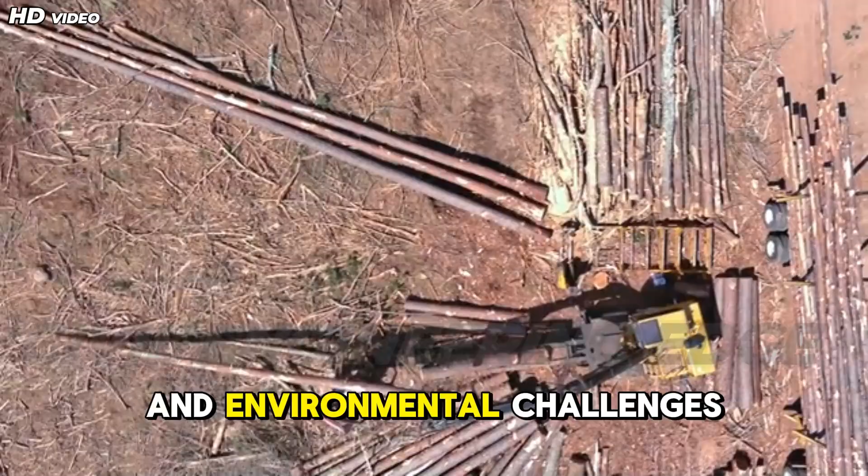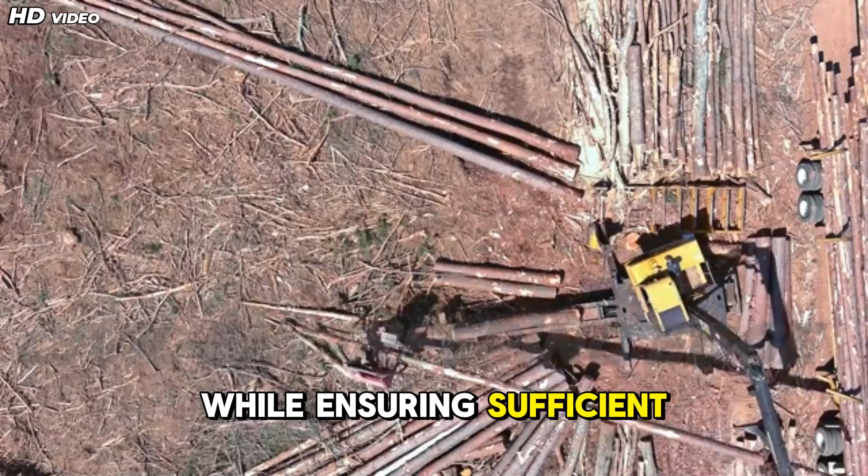From a civil engineering standpoint, designing vertical forests introduces new structural, geotechnical, and environmental challenges. Engineers must account for increased dead loads from soil, plants, and retained water, as well as variable live loads caused by wind acting on vegetation. Drainage systems must prevent water accumulation while ensuring sufficient moisture for plant health. Root containment and long-term durability are critical considerations.

At the urban scale, vertical forests function as ecological connectors. When combined with green roofs, permeable pavements, and urban wetlands, they form continuous biological networks that support biodiversity within cities. Birds, insects, and microorganisms re-enter urban environments, restoring ecological balance that traditional construction erased.

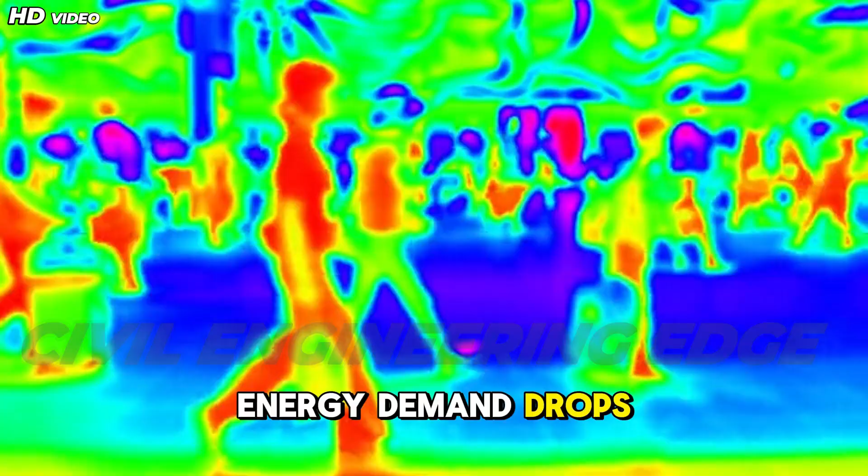These systems also mitigate urban heat island effects by providing shading and cooling through evapotranspiration. Surface temperatures decrease, energy demand drops, and thermal comfort improves. For cities facing extreme heat events, this represents a vital climate adaptation strategy.

As vertical forests multiply, cities begin to behave like living organisms, regulating temperature, filtering air, and responding to stress. Buildings become the cells of an urban body, interconnected and mutually supportive. This is not architectural symbolism, it is ecological engineering at city scale.

Policy and regulation: preparing for a living built environment. The transition to bio-integrated cities cannot occur without significant evolution in policy, regulation, and governance. Current building codes were developed for inert materials and predictable systems, leaving little flexibility for living components that grow, respond, and change over time. As a result, regulatory adaptation is one of the most critical challenges and opportunities of this paradigm shift.

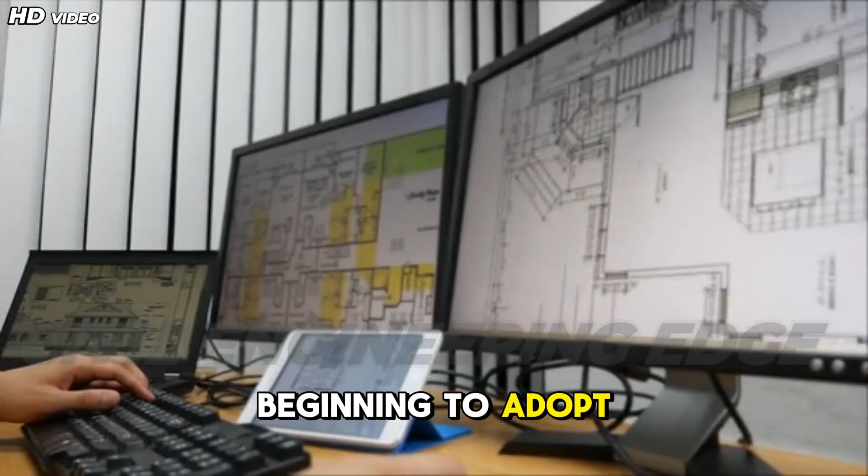Governments around the world are beginning to adopt performance-based regulatory frameworks. Instead of prescribing specific materials, these codes evaluate buildings based on outcomes such as safety, durability, energy efficiency, and environmental impact. This allows engineers to demonstrate compliance using innovative bio-integrated systems.

Public funding plays a crucial role. Many governments now support pilot projects, research grants, and demonstration buildings that test living technologies under real conditions. These projects generate performance data that informs future regulations and builds public confidence.

Professional bodies and engineering institutions are also updating standards and curricula to include bioresponsive materials, adaptive systems, and life cycle-based design. Engineers are increasingly involved in policy development, translating complex technical realities into workable regulatory language. As regulations evolve, bio-integrated architecture will move from experimental status to accepted engineering practice, unlocking large-scale implementation while maintaining safety and reliability.

Role in the shift: how living cities will change daily life. The emergence of living cities will reshape everyday life in profound but practical ways. For residents, bio-integrated buildings will offer cleaner air, improved thermal comfort, reduced noise pollution, and closer connections to nature even in dense urban environments. Homes will adapt to weather conditions, offices will regulate air quality naturally, and public spaces will feel healthier and more resilient.

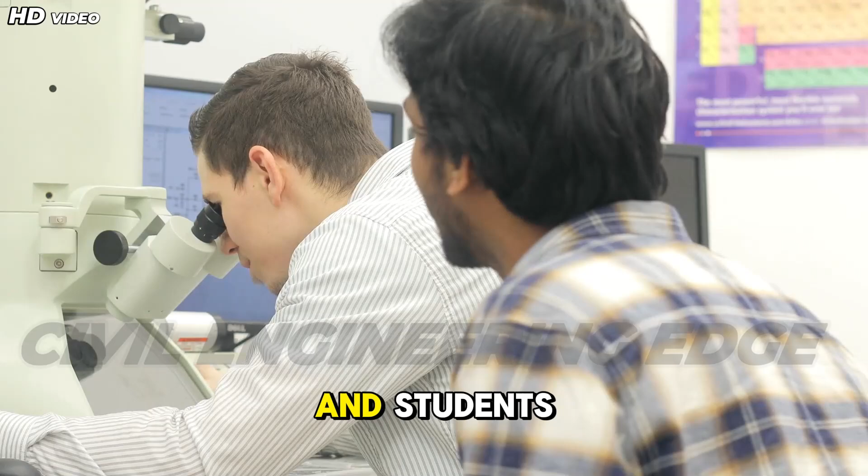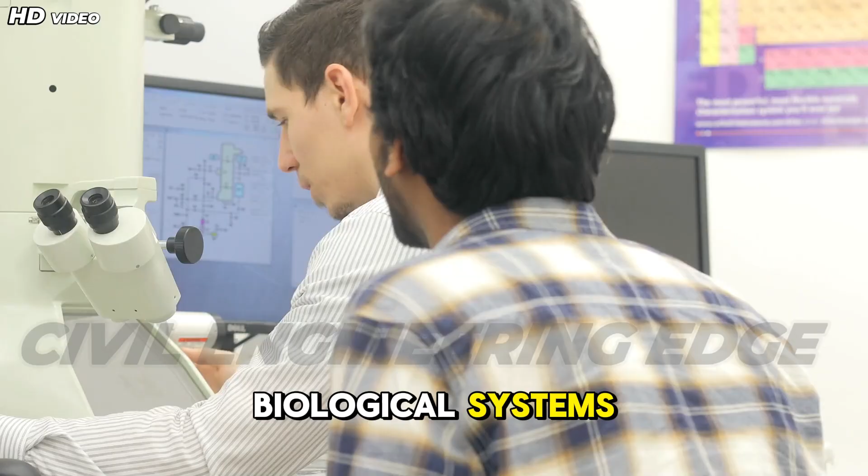For civil engineers and students, this shift represents a transformation of professional identity. Future engineers will not only design structures, but also manage biological systems, interpret sensor data, and collaborate across disciplines. Skills in sustainability, systems thinking, and interdisciplinary coordination will become as essential as structural analysis.

Cities will become safer and more resilient. Adaptive infrastructure will respond to heat waves, floods, and pollution events in real time. Living materials will reduce maintenance disruptions and extend service life. Over time, infrastructure will improve rather than degrade. As citizens, people will live in cities that feel responsive and humane, cities that support physical and mental well-being.

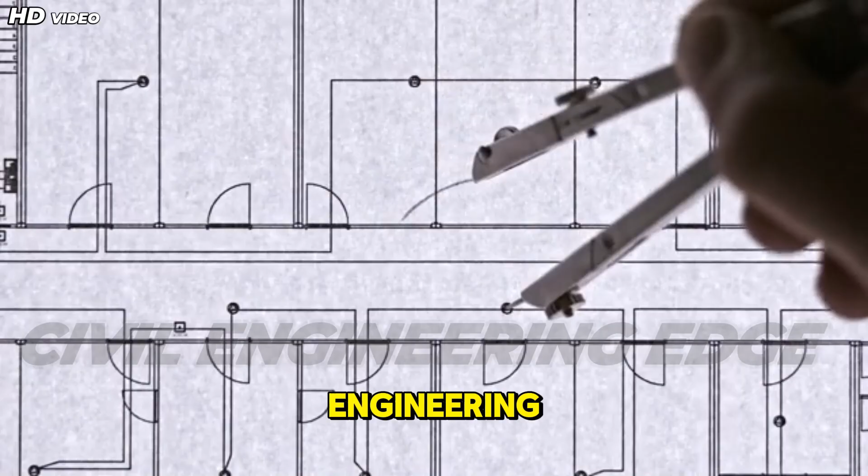The living city is not a distant vision. It is a gradual evolution already underway. The future is not about abandoning engineering principles, it is about expanding them to include life itself. As we stand at the edge of a new engineering era, one truth becomes clear: the future of construction is no longer inert, it is alive.

Living buildings and bio-integrated infrastructure are not distant concepts. They are the next logical evolution of civil engineering. As engineers, students, and innovators, we carry the responsibility to design structures that do more than stand. They must adapt, regenerate, and heal the planet.